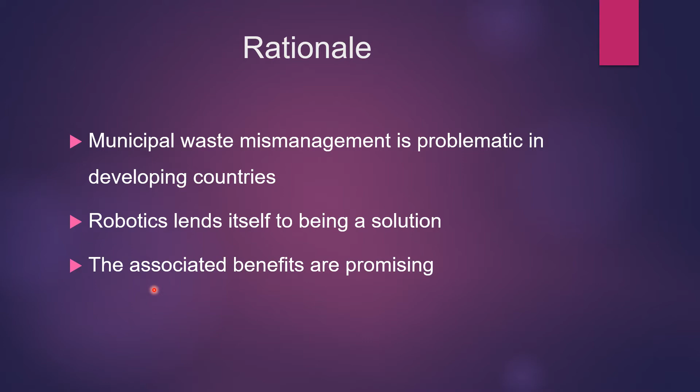As laborers, robots are not paid, do not suffer from fatigue or boredom, and are highly productive. And far from just saving money, robotics has created job avenues and niche industries that did not exist until recently. The ongoing proliferation of robots, even in this endeavor, can lend itself to being solutions to other crises now and in the future. Anca Dragan, roboticist from UC Berkeley, defines a robot as a physically embodied, artificially intelligent agent that can take actions that have effects on the physical world.

In keeping with this definition, there are components of the robot that become indispensable to it. These are the body or its chassis, sensors, a power source, actuators, and artificially intelligent programming.

The key design metrics for the drain cleaning robot are based on the expectations that the client, that is, the University of the West Indies, has for this robot. These design metrics are autonomy, compactness, durability, ease of maintenance, affordability, and aesthetic.

In order for ACID to be a functional solution, it needs to be able to address its constraints. These constraints are primarily concerned with how the external environment will impact ACID's performance in drain cleaning. Generally, these constraints fall under two categories: environmental and logistical constraints.

Environmental constraints typically deal with the presence of water in the drain while the robot is cleaning, moisture in trash, drain cross-sectional profile and how that will differ with the robot's cross-sectional profile, the primary and secondary gutters and how the robot will perform in both primary and secondary gutters,

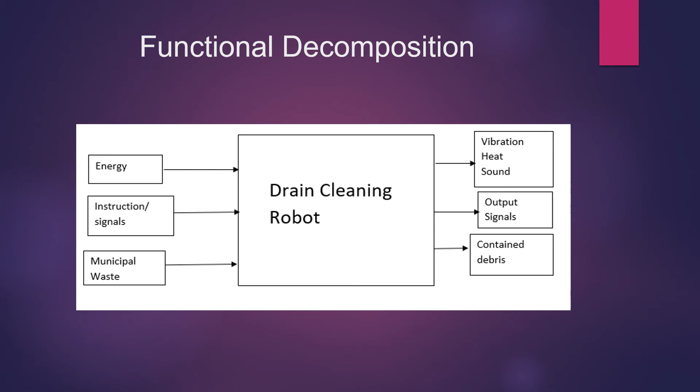This design concept is called G-Truck. G-Truck features ultrasonic sensors to its sides and front, as well as conductivity sensors for trash detection. It also features 4 DC-powered motor wheels, as well as 2 pairs of counter-rotating rollers powered by DC motors.

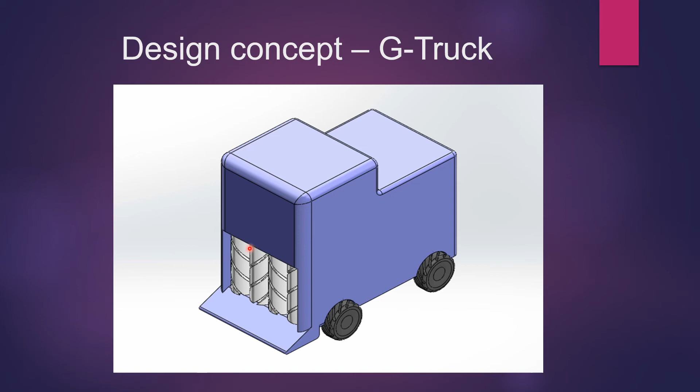When rollers activate, trash is entered into the body through here and through here. After the trash passes the 4 rollers, it then passes through this flexible member, which acts like a valve. The robot has tactile sensors in the bin compartment to detect when it has reached full capacity.

This design concept is called the Muncher. The Muncher is equipped with 4 DC-powered wheels, as well as ultrasonic sensors to the front and to the side of the robot to enable it to move in the gutter.

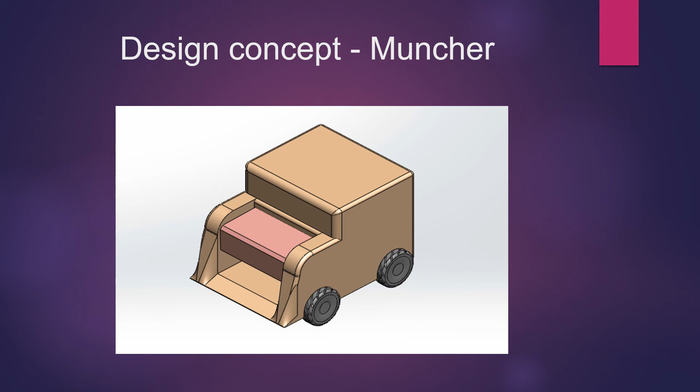It will also use conductivity sensors, which would activate other actuators so the robot can clean the gutter. After conductivity sensors test for the presence of trash, linear actuators would push and pull on this bracket, with its motion guided by tracks cut out into the body of the Muncher.

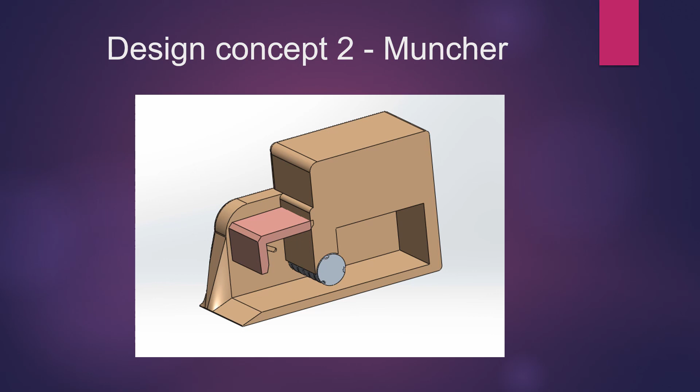When this happens, trash is pushed from this area to the rollers. The rollers will then spin and force the trash into the bin compartment of the robot. Tactile sensors along the walls of the robot will indicate when it has reached max capacity.

This design concept is called Convertible. Convertible would feature ultrasonic sensors to its side and front to help with navigation in the gutter, as well as conductivity sensors near the base and the roller to enable it to detect trash.

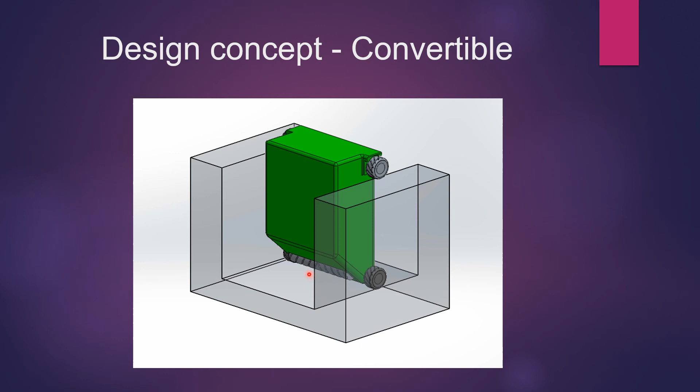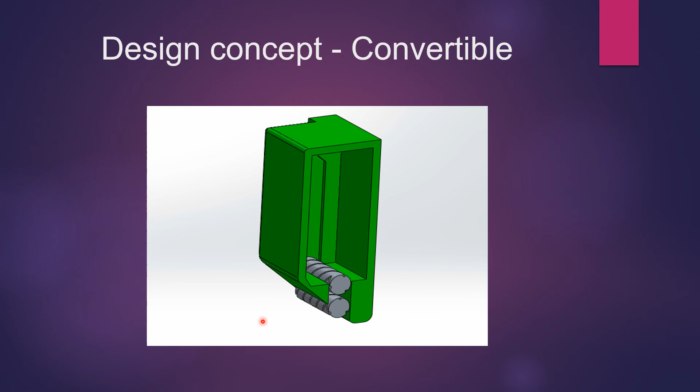When it comes into contact with trash, the rollers would activate and suck up the trash vertically. After trash is picked up by the first roller, it is then redirected to the second roller, allowing it to be stored in this bin. This design is called Convertible because whether it is upright or landscape, it would still work as a gutter cleaning robot.

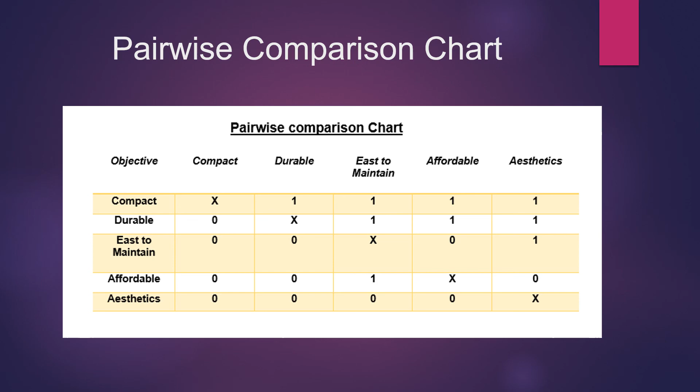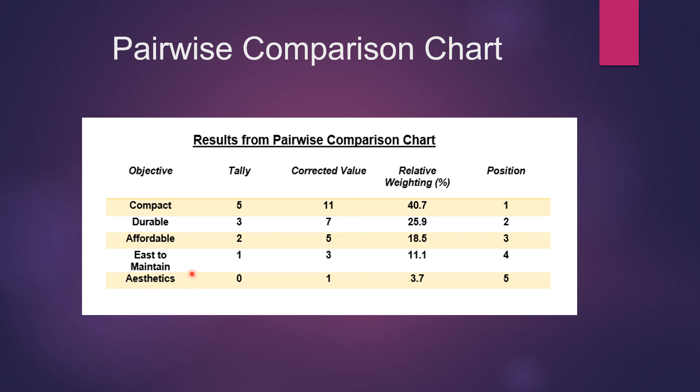This diagram shows the pairwise comparison chart for all the designs in this project. Autonomy was excluded because it was a feature to be incorporated in all robot designs. These are the results from the pairwise comparison chart: compactness ranked as the most important key attribute, while aesthetics ranked as the least important.

From the design selection matrix, it can be seen that concept 2, or Convertible, had the highest weighted total, and is thus selected as the final design for the drain cleaning robot. It will be further optimized and developed as this project continues.

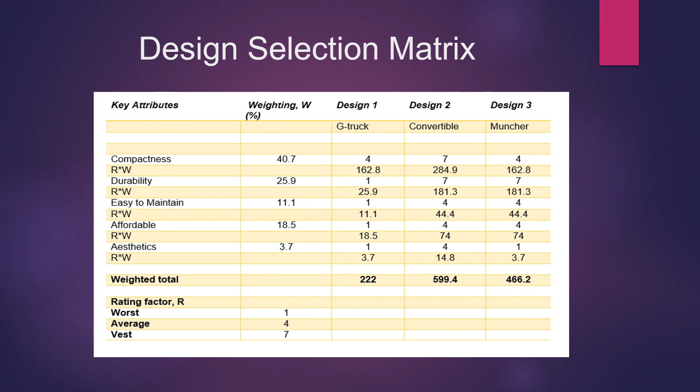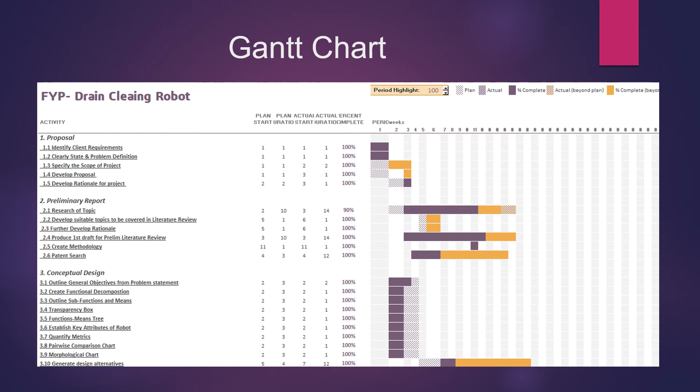This is the Gantt chart, which chronicles various aspects of the project with time in weeks. As you can see, some steps were already carried out, some took longer than expected to complete, and some have yet to be completed.